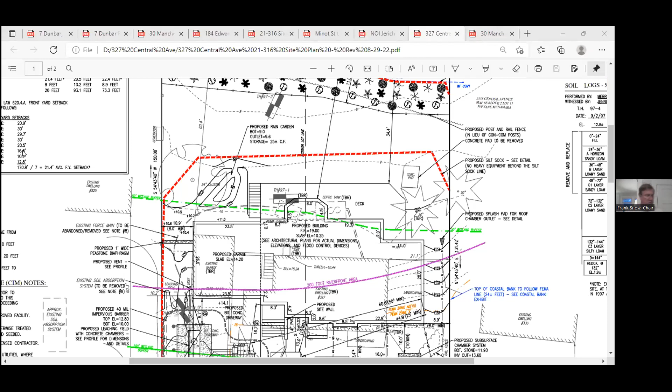Does that need to be opened? Yes. No. Yep. Yes. Yes.

On October 3rd, 2022, at the 6 p.m. meeting, the Scituate Conservation Commission will hold a wetland hearing under Chapter 131, Section 40, Massachusetts General Laws, and Section 30700, Town of Scituate Code of Bylaws, regarding the application of Linda Kosher for work related to raising and rebuilding a single-family dwelling at location 30 Manchester Street, Scituate. Abutters and other interested parties are invited to attend. Information to access the virtual meeting is available on the agenda posted on the town website.

So I'm going to go to Richard again, just because. Isn't there going to be an opening presentation? Yeah, this one's yeah, also Josh Green Merrill. Thanks, Richard. Frank, let's just cut to the quick. Okay.

For the record, Josh Green from Merrill Engineers and Land Surveyors, representing Linda Coker. The existing property at 30 Manchester Street currently has a single family house on it. It has a couple porches with a garage and a few outbuildings, mostly used for storage. There's an existing cesspool on the property that serves the single family house. As far as resource areas, there's a top of coastal bank along the existing seawall that separates the property from Humarock Beach. There's also a VE and an AE FEMA flood zone on the property. The coastal bank is delineated in purple and the FEMA flood zones are delineated in the yellow-orange color running through the property.

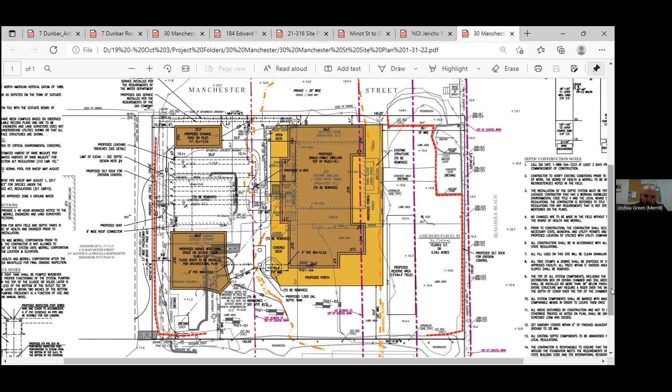Okay, well I will get clarification on that. I'm pretty sure it's being removed though. Great, that would be ideal. So if it is, we can just update that.

And then I may be missing it on the plan, but what will the pervious driveway be made of? I know talks were whether it's seashell or stone dust or something like that. I don't think they've determined 100% what it is though. Okay, I think that would be good to know as well. Okay yeah, those are my two questions.

Brendan? I'm out of questions. Okay. Amy, thank you everyone. Amy, I should have asked you first. Sorry, we'll see if I get back on the wheel. You want to go ahead?

Sure, I mean I'll just say that there's a lot going on the plan for sure. And this is, like Richard said, it's a lovely lot. Barrier beach, coastal dune, land subject to coastal storm flowage. I mean you've got AE and you've got velocity zone, you've got LiMWA. I mean they show coastal bank, but I really think that you've got vegetated coastal dune.

I think if anything, it's like what can you get to maybe make this site better? And I don't know, just a general observation for Humarock. It seems like a lot of these rebuilds, which is great, we're getting them elevated and they're going up, which is what we want to see. And it's what they need to do to make them comply with the regulations for coastal resource areas. You know, they're going to go on driven open piles.

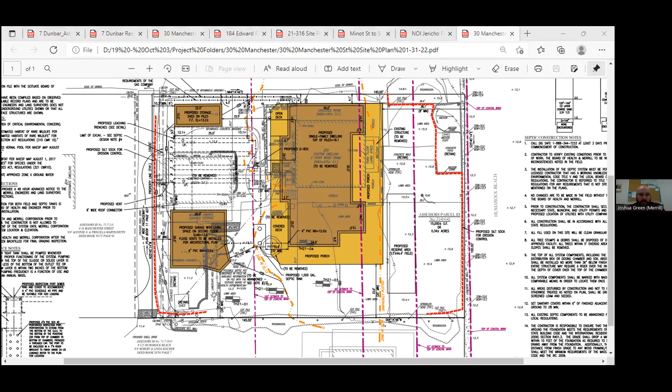We're gonna go back to Jericho Road, right? Do we not need a motion to actually continue New Driftway? Yes, we do. I make a motion to continue 7 New Driftway to October 17th.

Speaking of motions, we voted that, right? To do the 7th? Yep, okay. I second it. All right, 7 New Driftway, continue to 10/17/22. That's a motion by Richard, second by Andy, all in favor. Doug, yes. Brendan, yes. Frank, yes.

Thanks for that. See how confused you get without any women around? Oh boy, we still have two. Don't. I just read something that you're supposed to be more careful. Yeah, don't get yourself in trouble now, please. Okay, let's not do that.

So how about Jericho Road Boat Access Facility? Where is that? I'm gonna unmute Jeremy. Just after you read it.

On 10/3/22, 6 p.m. at the Town Hall, Scituate Conservation will hold a wetlands hearing under Chapter 131, Section 40 of the Massachusetts General Laws and Section 30700 Town of Scituate Code of Bylaws regarding the application of the Town of Scituate for improvements to the boat ramp, parking lot, lighting, and miscellaneous floating dock and gangway repairs at the Scituate Harbor Public Access Facility on Jericho Road. Scituate abutters and other interested parties are invited to attend. Information access to virtual meetings available on the agenda posted on the town website.

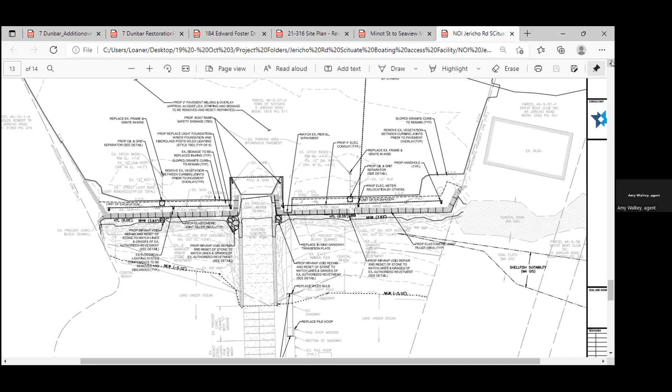It's not going to happen. I think closing with conditions would be the way to go. Okay, unless you want to, what would we be leaving it open for? Just to add those pieces of erosion control are the ones that I'm seeing. No, we're way too busy to do that. Let's close with conditions.

Okay, yeah, sounds good. I mean, Jeremy, you can deal with that, right? Would you rather do it that way? Yes, that's acceptable to the proponent. Yeah, okay, no, we should do it that way. Okay, take a motion.

I'll make a motion to close Jericho Road ramp and revetment repair with the conditions discussed pertaining to erosion control.

Sounds pretty good. All right, anybody want to second that one? Second, Andy. All in favor? Richard, yes. Brendan, yes. Frank, yes.

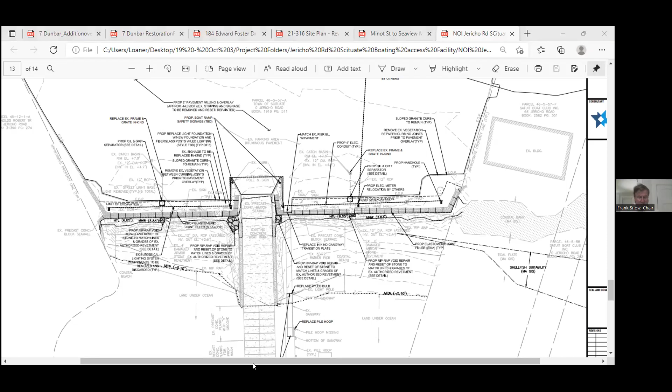Edward Foster, 184 Edward Foster, sorry. So this is continued from 8/22. We have Paul Marabito, and Ross, somebody from Ross.

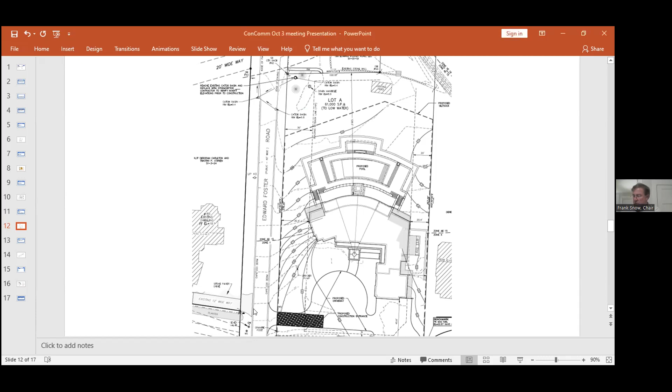Okay, thank you. Can you hear me, Frank? I can. Great, all right, Paul, thank you. The applicant owns property at 184 Edward Foster Road.

The plan on the screen is a stormwater permit. It shows the location of the proposed dwelling and some stormwater improvements, which we submitted a few weeks ago. The stormwater application has been sent out to peer review to Merrill. We received the first comments last Monday or Tuesday. Since then, we've responded three times and finished the responses today.

Deb Keller from Merrill was reviewing them, and she submitted a letter through Grady Consulting this afternoon. She's all set with the review comments. The one thing I want to point out, this plan shows in the upper left-hand corner of the site a proposed Stormceptor being installed in the lawn area of the locus.

For whatever reason, what's left off the plan, we'll add—there's another Stormceptor that we proposed. We talked about this about a month ago with the commission. We're also going to install one in Edward Foster Road on the harbor side of the last catch basin, which is shown on the plan. What that'll do is...

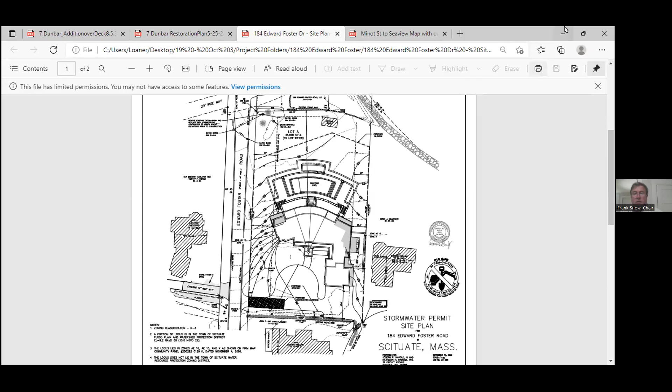No, we don't show it, Frank, because there's no coastal bank. The 15-foot contour, which we show on the plan, we show as zone AE 15, and the uphill side is zone X. So the only resource area would be land subject to coastal storm flowage, so there wouldn't be a 50 and a 100 from that.

From the revetment, Paul? No, because in the DEP regulations, Frank, where they talk about coastal banks, they specifically mention that a revetment is a coastal engineered structure and it is not a coastal bank. That's why on the plan we submitted, we show that type of revetment as a coastal engineered structure, so it follows what's in the DEP regulations under section 310.27.1.

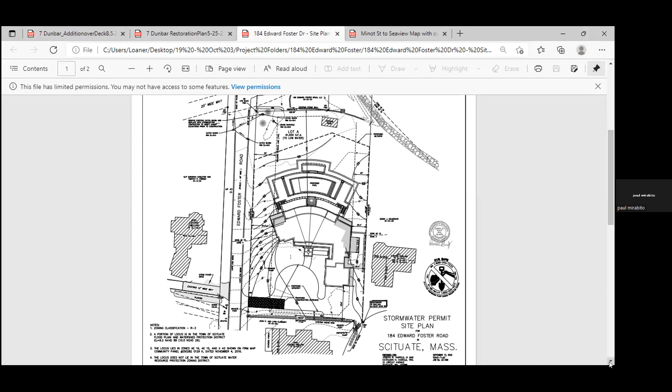I also verified that with Stan Humphreys at the outset of the project, and he was the one who suggested we put that notation on the plan, which we did, showing the Tapley revetment to be a coastal engineering structure. So the resource area is everything below elevation 15. Yes, I think that's important for the commission to know.

All right, let's see. Doug, you probably can fathom this better than anybody. Do you want to start with this one? I think that might help some of the other members.

Sure, your question was, it's hard to believe that there's not an offset from the Atlantic Ocean. But if you take the elevation 15, then everything on the lower part of the yard is in some sort of jurisdiction.

Yeah, I get that. And there is. It's just hard to see it from this plan, so maybe I'll screen share a different plan. Okay.

All right, sorry, I didn't mean to interrupt. Doug, go ahead. No, that's okay. But I get it. I'm anxious for them to complete, or hopefully they were years ago, working on some regulations for land subject to coastal flooding, because we always have this situation where there's no performance standards for that.

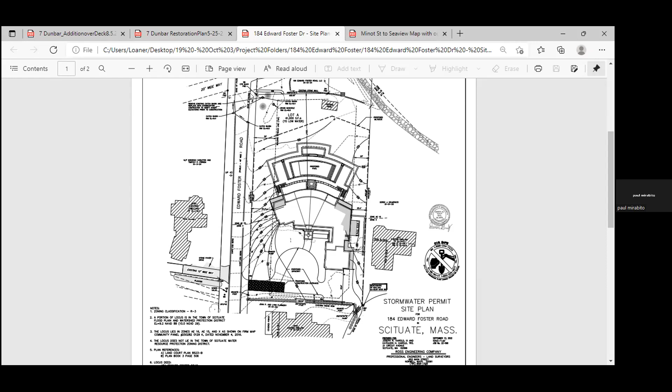And what we're going to do is add a second Stormceptor on the harbor side of that catch basin. We'll leave the existing basin in place and just add one on the existing drain line. What that'll do is pick up the runoff coming down Edward Foster Road from the top of the hill. That system in Edward Foster Road is a basin-to-basin system. The last catch basin is shown on our plan, and from there, there's a pipe that goes out to the harbor.

So the water exiting Edward Foster Road would also be treated? Yes, that was part of our proposed mitigation. I think that's a great idea. It is clear to me that on Edward Foster Road, there already was kind of an existing swale that headed down in that direction. You can see it with the grading, going down the right side of the road as you look at it, because it's all going to that one basin on the right side.

Originally that other drain manhole, what was that there for? I think that was some kind of a yard structure that the previous owner had installed some time ago. Okay, there's no other additional outlet that you have to deal with from that? No, not that we know of.

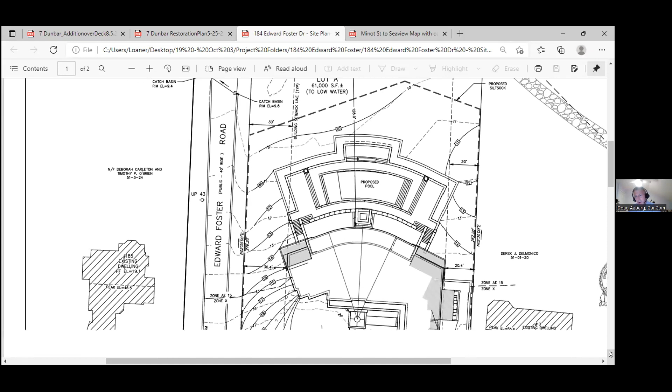That looks pretty clear that way. I'm gonna ask, we don't have to talk about this further, there's no real topography on the east side of the property line because you're on someone else's property, I get that. But you talked about a swale on that side to ensure the water keeps going. There's that existing foundation that still remains, correct? The existing foundation of the house? Yeah, there's like a little retaining wall left there that the AE zone jumps up over. My question is really just to ensure there actually is adequate swale on that side, so that particular abutter doesn't have water diverted.

I'm looking at the grade lines, like the 21 contour and the 22, which by this plan look like they're headed right towards that house. I want to make sure of that. Well, the grading, when the landscaping is put in that area, will all be directed down to the lower part of the lot and over toward Edward Foster Road. In fact, when you get further downhill, the abutting property is also shedding water onto our property, it's just the nature of the way the grading is in that lower lawn area. So some of their water will also be picked up and treated.

You're saying that their lot is flowing from east to west? Some of it is, yeah, the grading on our plan shows that. We also submitted the existing conditions plan that shows what was out there prior to any work being done. And if you stand out there, you can see that. You can tell by eye that there's a slight slope going toward Edward Foster Road from the abutting lot as well.

Okay, so let's see. I'm looking at, I guess this is the water flow. Yeah, that's doing okay. We have a review consultant too, so I'm just gonna ask Doug to make sure she's satisfied with that. Throughout the course of the project, we'll be doing some staking and grading for the contractor as he goes along. We'll also be doing an as-built plan to make sure the grading is compliant with the design plans and that the water does go in the direction that I just talked about. Okay, yeah, it's just tight.

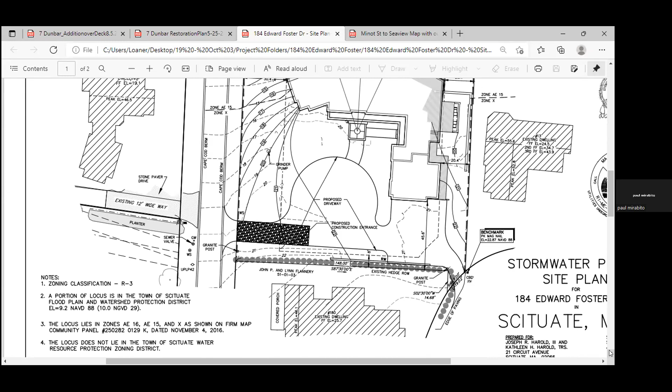And is there a new, does the proposed driveway loop around and connect out the other side? It kind of looks that way, that there's a small access right by the corner of the property? Yeah, they have the right to pass and repass from Circuit Ave onto their property. There's a deeded passageway there, which they're going to use. Okay, but that little portion right there, that's new, oh, so that connects it through.

Doug, this is Deb Keller. Yes, hi Deb. Two things to add, right where that driveway connects to Circuit Avenue, you don't see it on this plan, but there was an existing garage in that corner of the property that blocked them from making that access. So my understanding is that garage is being removed as well.

And secondly, they have done, and I was provided a revised plan that shows a little bit more of swales on both sides of the property. We're not seeing it on this plan, but they tweaked the grading a little bit to show more of a defined swale on both sides there. So hopefully that will get through to the commission so you can see that they make sure we get those swales and direct the water not onto the abutting property. Gotcha, okay, yeah. So that's that, and I'm not doubting that, it's just hard to tell from the plan, so I just want to make sure that's taken care of.

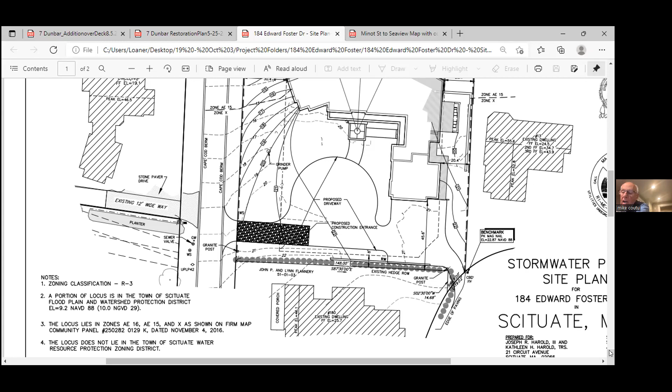One of the other major issues I've heard addressed is the impervious surface. If you look at the plan, we tried to reduce the amount of impervious, but we're limited because our main terrace up at the house is coming under the porch and has a basement below it, so that can't be any kind of porous paving. We're proposing on the north and east side of the house a substantial amount of wood deck, and that wood deck essentially acts as a porous paver. There'd be crushed stone below it, allowing water to slowly infiltrate. Approximately 38% of the paving on the sitting deck areas on the north and east side I would consider to be porous material, being wood decks.

Let's see if there's any other notes. Essentially, those are just some of the things I wanted to point out to the commission as they start generating their list of questions. But I'm here if you need any other answers. I'll be happy to help.

Where were we? Asking for any abutters? Anybody? Do we have anybody in the audience? Deb? Does Deb want to add something to this point?

Thank you, Frank. Just a quick question. Out of curiosity, the stormwater plan didn't give an elevation for the pool. What are the elevations of those retaining walls wrapping around the pool?

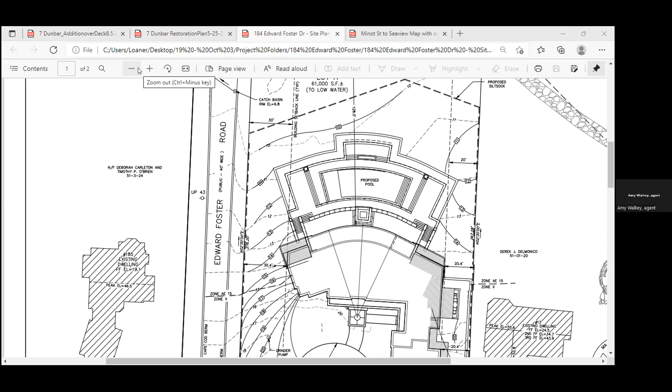I have a comment just about that, if there's tie-ins to town drainage, that we do need the town engineer to agree to it. We definitely need something in writing from the town about that. I think that would be the most important thing to get at, Paul. If you can get together with, or come up with something that can be submitted to Merrill, and at the same time get to DPW right away with that, so that they understand and don't raise any flags, because that's what you don't want to keep having.

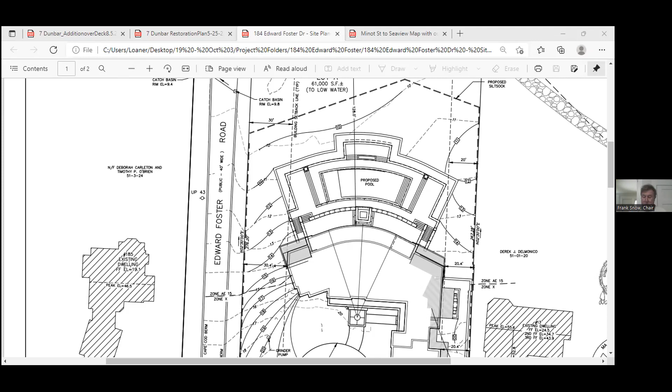Where is the agenda? Are we on Atlantic Ave? This is an RDA. Where's my sheet?

On October 3rd, 2022, during the regular meeting at 6 p.m., the Scituate Conservation Commission will hold a request of Kevin Douglas and Kevin Hokinson for a determination of applicability to the Massachusetts Wetlands Protection Act and the Scituate Wetlands Bylaw for activities related to repairing and resurfacing existing roadways on Atlantic Avenue, Barrett Street, and Seaview Avenue in Humarock. Abutters and other interested parties are invited to attend. Information to access the meeting is available on the agenda posted on the website.

So do we have an applicant on tonight? Yeah, I just unmuted Joanne Douglas, so I think that's Kevin Douglas. Good evening. Hi. Hello. If you want, Mr. Douglas, explain to us what you're doing.

Sure, so I'm here with Kevin Hokinson. We're both here together to represent our neighbors on Atlantic Avenue. The existing pavement on Atlantic has been deteriorating for several years. It's fraying along the edges. There was a collapse at one end of the road last year. Before that happens at the other ends, which is Seaview and Barrett, we're not planning to excavate the road. We're planning to put just a 1.5 inch coat on top to resurface it and repair the edges and where the road failed. On Barrett and Seaview, they've taken more of a beating over the years because they sit totally exposed to the ocean, so they need to be regraded with 2 inches of binder and a 1.5 inch top coat. So that is what we're here for. We've spoken to all our neighbors on Atlantic Avenue and most, if not all, on Seaview. One of the neighbors has been speaking to the folks up his end of the street on Central. Kevin and I have talked to all the folks down our end on Central, and everybody we've spoken to is in favor of doing this. So this is the first step for us, to come to you folks and see if we can do what we need to do and want to do.

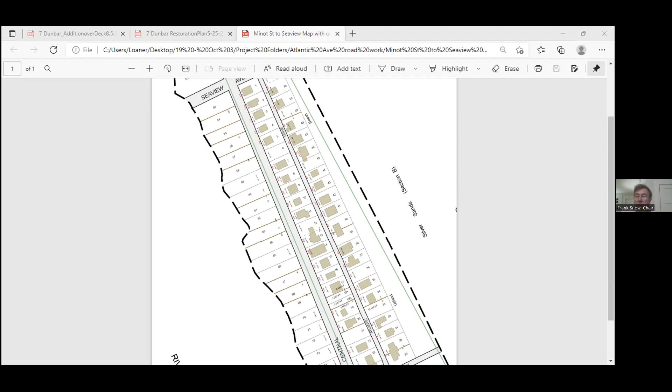Everybody's like, Mr. Douglas is talking, but I can't hear him. Do we have him muted, or does he have himself muted? There you go, go ahead.

Will we know when you're coming out? Do you want us to know? No, we're gonna sneak up on you. No, we'll get in touch. Okay, so we'll all know. Right, okay, good, great night. Thank you, thank you, have a good night. Good night.

Okay, request for minor modification, 7 Dunbar Lane.

Greg Morse is on the call. Greg, were you just able to unmute yourself? No, I just got a notification for the host to unmute me. Oh, I did, oh that's good. Great, thank you. Yep.

For the record, Gregory Morse, registered engineer, representing Greg Kelleher, the property owner at 7 Dunbar Lane. This is a notice of intent that we filed several months ago, which was ultimately approved by the commission to allow an addition to be constructed on Mr. Kelleher's home at 7 Dunbar Lane. The approved plan is on the screen here on the left-hand side.

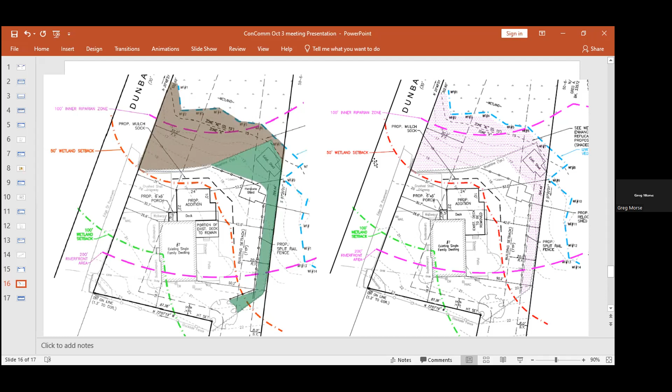Okay, all right. I'm sure you recall there was a buffer with it. Yes. Yeah, all right, that's all.

Okay, anybody want to make a motion? And I'll jump at it. Oh yeah—I will make a motion that we approve the minor modification to 7 Dunbar Lane with respect to the proposed addition and removal of an existing deck. Hey, don't make it too complicated for Jen, she's just got to write all that down.

So, all right, hear ye. Do I have a second? Second, Andy. All in favor? Brendan, yes. And Richard? Yes. Thank you.

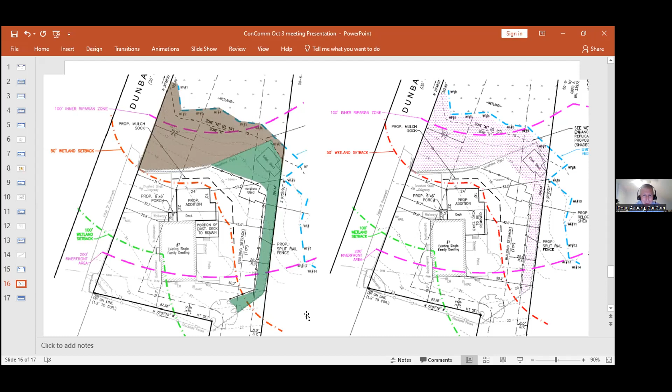All right, I'll throw in some more therefores and such. No, I think if Jen could—sorry, Jen—if Jen could comment on this, she would. I wish I was there to watch her.

How about order conditions for 20 Mann Hill? I vote to approve the conditions for 20 Mann Hill as written.

Second. Amy, before we vote on that, can I just ask you one thing? Did we get the plantings and stuff that we wanted for that? I missed the last meeting. Did we get the plantings that we wanted? I saw some back and forth with the planning board, the trees, all that, everything. Yeah, well, there's a landscape plan—we don't have it in hand, but yeah, it all went down well.

Okay, and then also, there are orders not listed on this agenda, but that were pending Board of Health approval for Buttonwood. So you guys have already reviewed them, but we're going to also issue Buttonwood. Okay, almost done—the number for Buttonwood, hold on...

It's 17 Buttonwood. So maybe somebody other than Doug could make a motion to accept the orders for 17 Buttonwood Lane and 20 Mann Hill Road also.